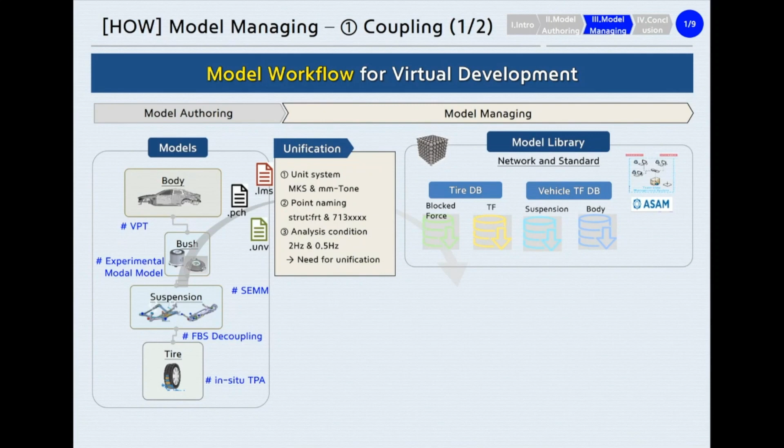However, we need to unify the unit system, point naming, and analysis condition to couple them. After converting them to a standard format, the models are ready to be coupled in a network database with global access. The next step is to make max use of these models for virtual vehicle development.

At first, we make a virtual vehicle using component-based TPA or virtual prototype assembly. Then we evaluate the target and perform detailed analysis such as transfer path analysis and model sensitivity analysis. Finally, we can listen to the road noise results for subjective evaluation as we did with an actual vehicle.

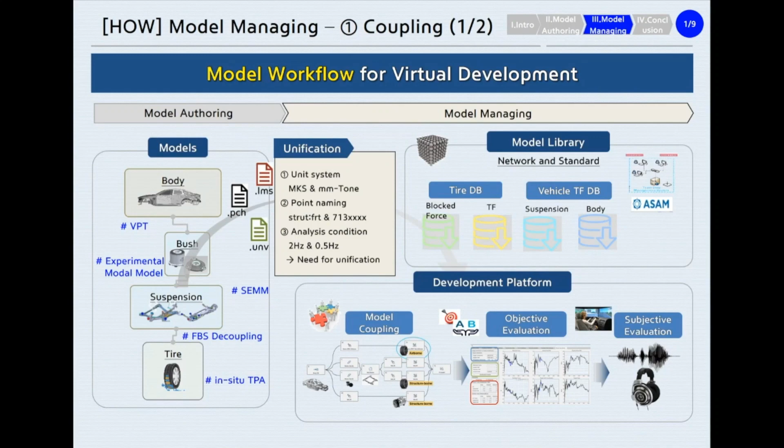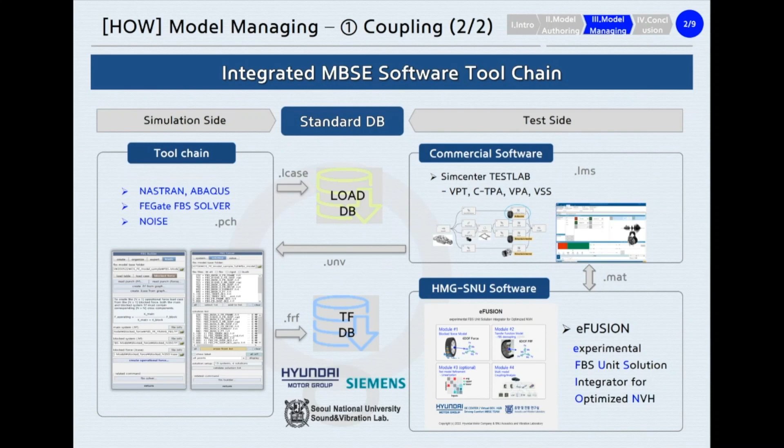To realize the virtual development environment at our worksite, we integrated MBSE toolchain, simulation, and test side. Regarding test side, we have been taking advantage of commercial software and our own software developed for local site use with the intimate cooperation of SimCenter Engineering and Seoul National University for several years.

Let's move on to the verification of what I have explained up to now. To clearly show how credible our model-based approach is, we compared the result from conventional vehicle-based measurement with new experimental model-based estimations step by step. At first, we compared the interface force from tire to suspension in 5 directions as follows. We found similar force profile between two approaches, which verified the credibility of experimental blocked force and transfer function model of our tire system.

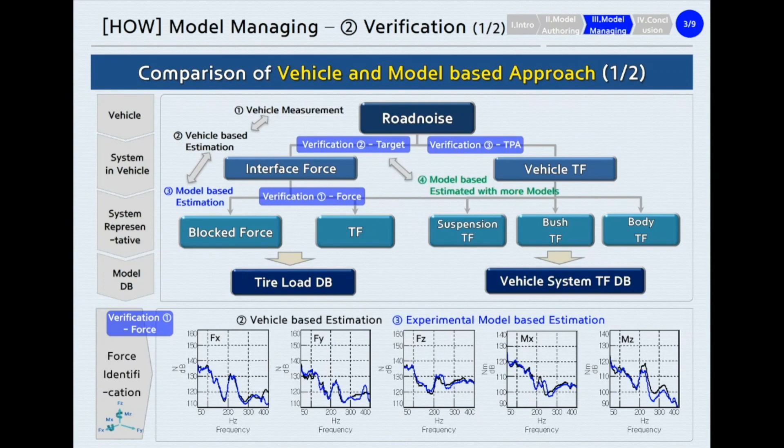Next, we compared the target road noise measurement from the various estimations, such as classical TPA with vehicle-based measurement, component-based TPA with 2 models, and virtual prototype assembly with more than 4 models. It was found that among vehicle and model approaches, they showed similar road noise profiles, which verified the credibility of suspension, bush and body model, and overall model coupling process.

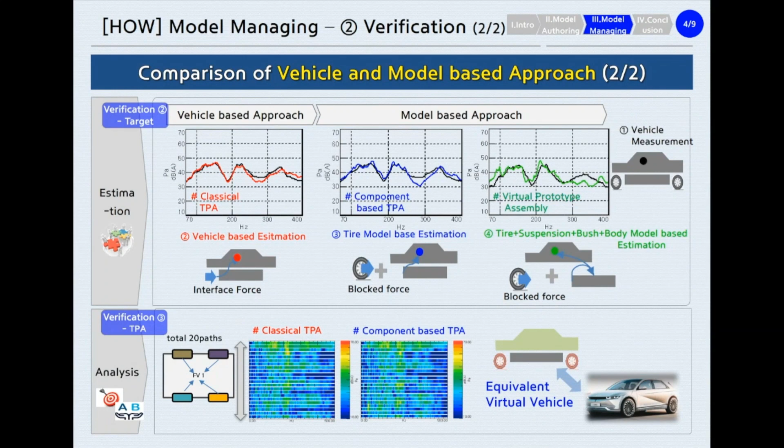Finally, we compared the transfer path contribution map across 20 paths and found very similar results between vehicle and model approaches. After a strict verification, I can now say that our model-based virtual development approach can provide an environment where we can do almost everything that can be done with an actual vehicle, a so-called equivalent virtual vehicle model.

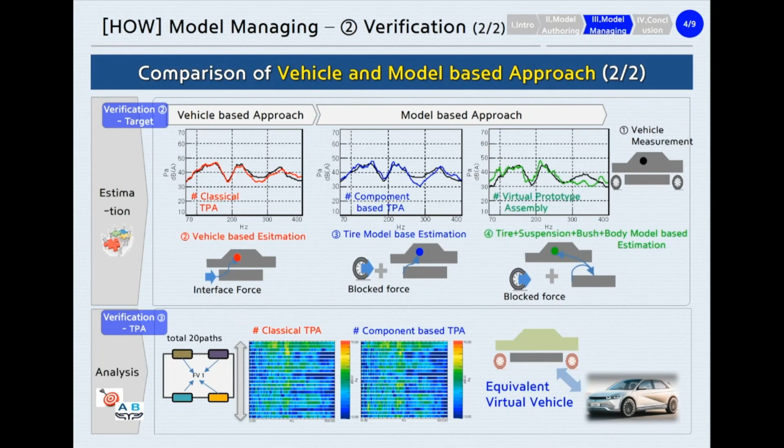After strict verifications, we have made max use of experimental system models for road noise development for modular architecture in HMG. At first, as our test model was originally designed to be compatible with the simulation model, the test model has been co-used with the simulation into a hybrid virtual vehicle model.

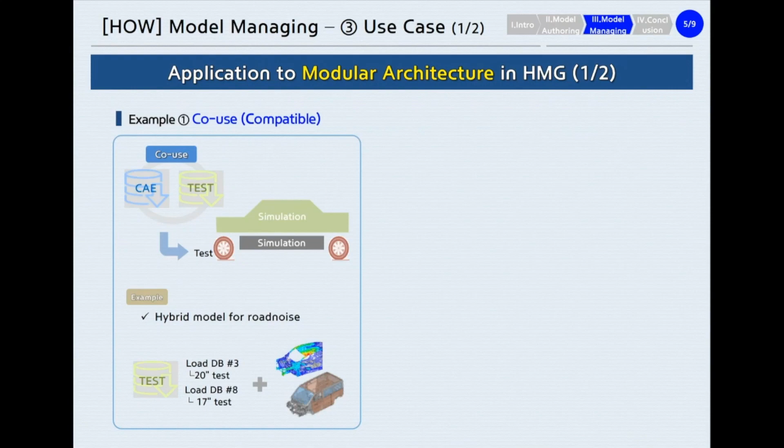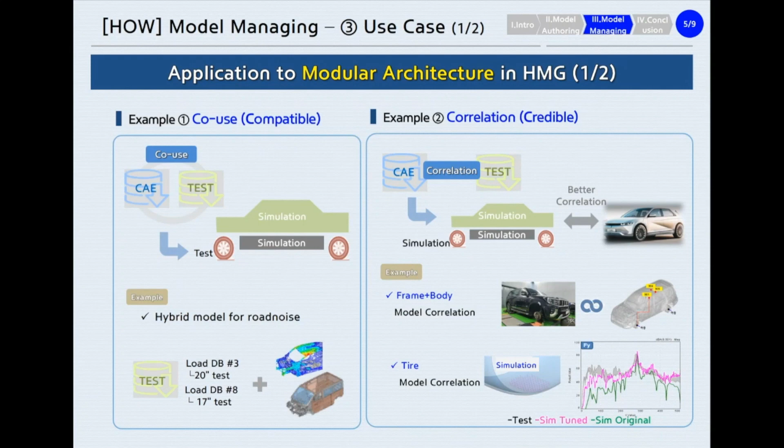Second, the system test model could be used as a system-level correlation tool more efficiently than conventional vehicle-level correlation. Finally, we adopted blocked force to better understand the tire's behavior and share clear component targets with our suppliers early in the development phase.

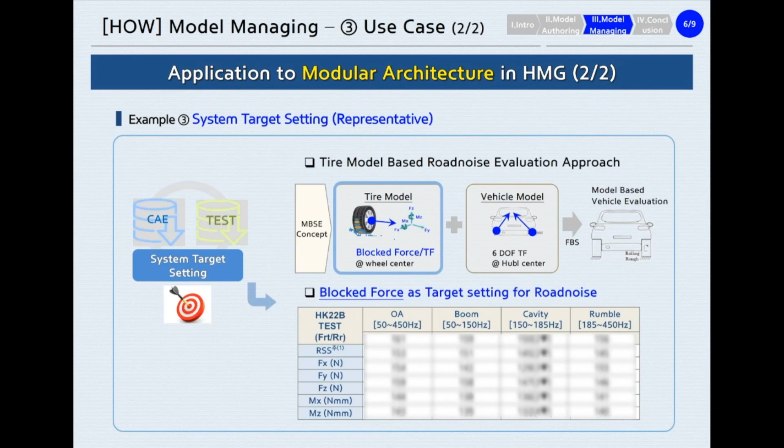Let's move on to our last topic, auralization, which means replaying and listening to road noise assembled with load and transfer function models before a physical prototype was even built. By coupling models, we can perform objective evaluations such as pass or fail compared to the target. However, until now, not enough subjective evaluations were done, which has been done with actual vehicles.

So, we built the traditional top-down vehicle auralization model with various contributors such as powertrain, tire, and wind. Also, we replaced road noise contribution with hybrid model combinations. This enabled the developers to listen to road noise from model changes at their discretion, which was impossible with the conventional system. To simulate various driving conditions, we made a database cube to retrieve a proper model depending on the driver's input.

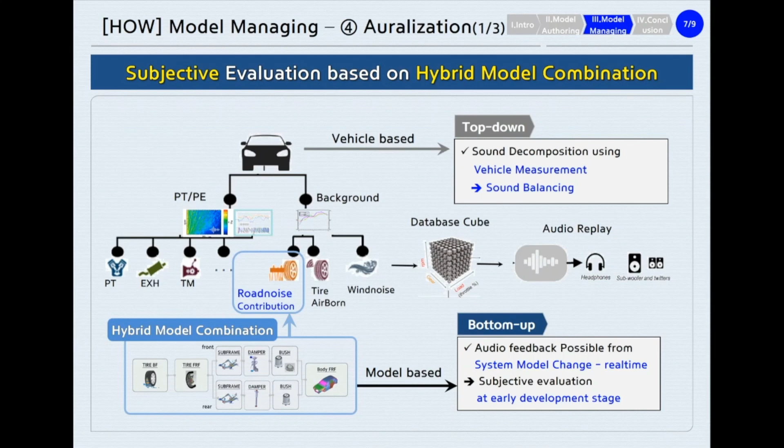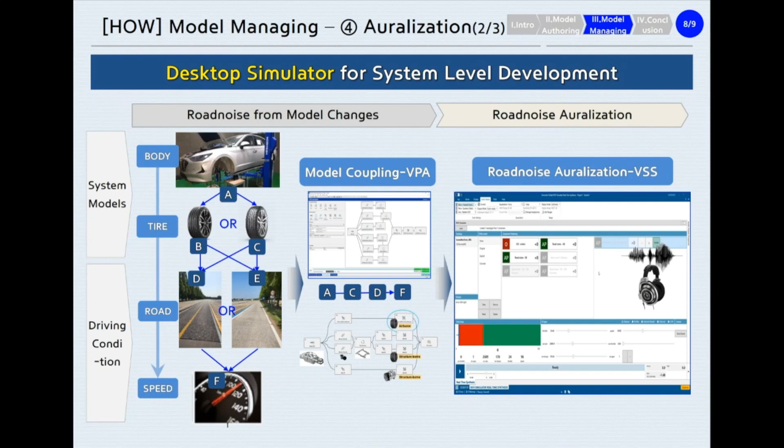In the beginning, we have been developing a desktop simulator in cooperation with SimCenter Engineering, in which the designers can listen to road noise resulting from model changes, such as tire, bush, and body, on various driving conditions such as road type and speed. As a further step, a dedicated virtual evaluation platform will be implemented using the driver's input device, vehicle performance models, and visual aid in HMG.

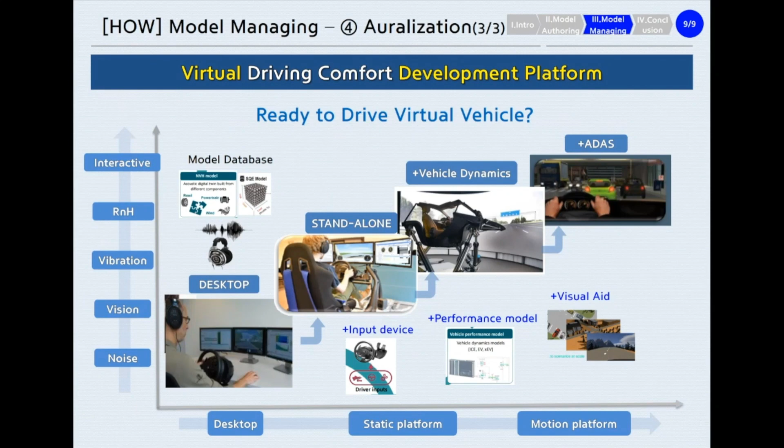Now, let me conclude this presentation briefly. Digital Engineering Center has been developing test data-driven MBSE technology consisting of model authoring for securing representative, compatible, and credible models, and model managing for presenting objective and subjective evaluation platform to developers. These research activities have been reinforcing model-based virtual development in HMG.